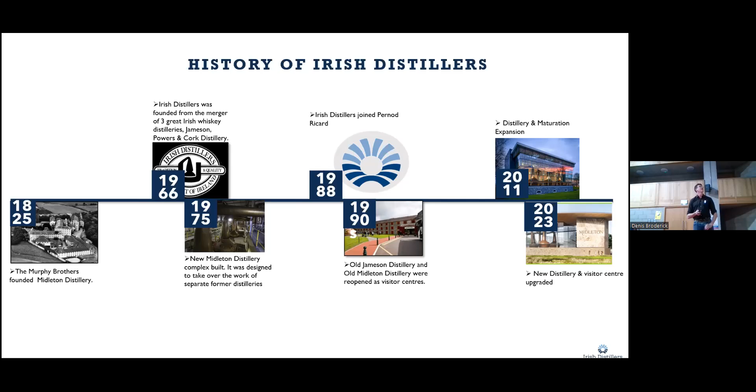A little bit more then—we have 5 locations in Ireland. Our production site is down in Midleton, and our bottling site is up in Dublin in Fox and Geese. Then we have our head offices in Ballsbridge, where all the business goes on within the company.

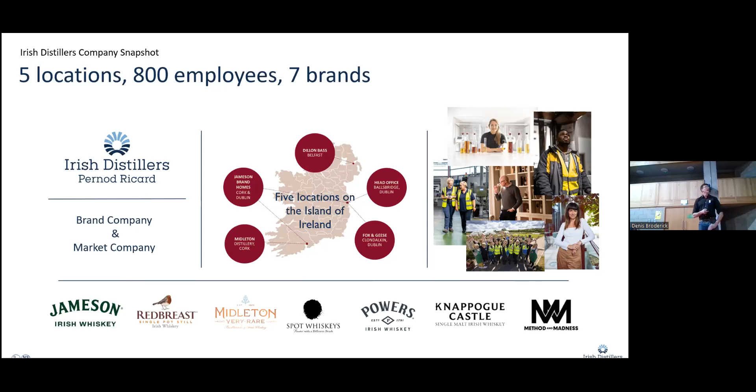Other things to note—when you think of the distillery in Midleton, everyone always thinks Jameson #1, which is fair, but we actually have a broad range of different products as well, including Redbreast, Midleton Rare, the Spot Whiskies range, and Powers, and on and on. So we're not just a one brand company.

So now to get onto the whiskey process—how whiskey is made from step 1. Whiskey takes a lot of energy to produce, which is why we're so keen on reducing the amount of energy we use. So just to take you through each step of how whiskey is made: we have grains that come in on site.

These grains go towards making beer essentially. So we make an intermediate product in our brew house. During the brewing stage, obviously there's a large amount of heat that goes towards brewing. I know for any CIT students here, you would have done the class on brewing.

You have your mashing. After your mashing, you must filter out the grain. And after that, then you must cool down the product before the yeast is added and it goes into fermentation.

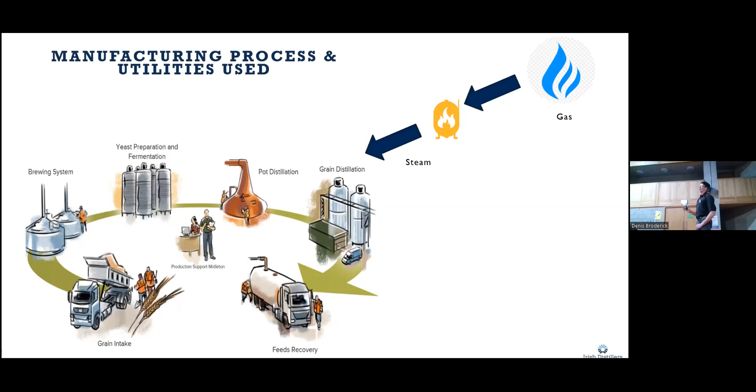The gas that we use on site, it comes in and we put it into our boilers, and our boilers produce steam, and it's the steam that we use for all the heating processes across the site.

We also have electricity, but all the electricity that we use down in Irish Distillers is green electricity. That means it's purchased - we pay a premium cost and get energy sourced from green sources. So there is no carbon footprint from any of the electricity that we use on site.

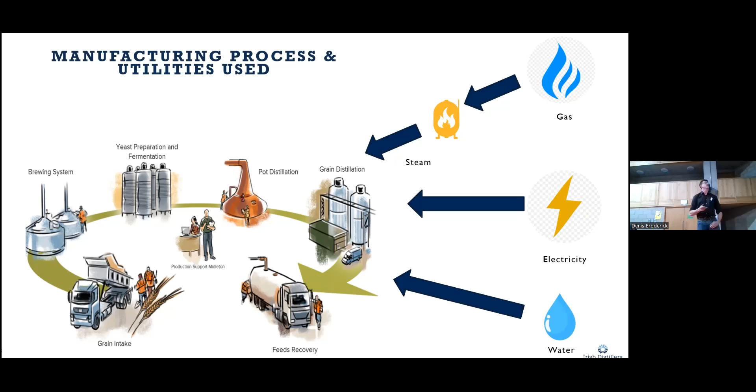And lastly is water. So like I mentioned earlier, we're alongside the Dungourney River and we have borehole water and cavern water as well.

So like I mentioned, sustainability and responsibility is a huge thing that we're taking on board inside Irish Distillers. We have a roadmap that focuses on 4 key areas: nurturing terroir, valuing people, circular making, and responsible hosting.

So these key areas, the one that we're going to be focusing on today is circular making, but it's important to look at the other aspects that we are doing in Irish Distillers.

In regards to nurturing terroir, we have a lot of natural habitats on site that we promote for different animals in our maturation warehouses. So planting wise, we plant specific habitats to encourage the natural habitats to grow. As well as that, we also do beach cleans on site, and we promote responsible drinking and value our people.

So in regards to circular making, this is what we're talking about essentially for the whole presentation here. The energy that we put in, that we're able to recover and reuse it, so that we're minimizing waste at every step by optimizing the production and the distribution of our product to help preserve natural resources.

So the key areas for this in Midleton Distillery is in water, to reduce our water by 20% by 2030, and then in terms of carbon, to remove all scope 1 carbon emissions by 2026. Scope 1 carbon emissions is any carbon emissions that's produced on site from distilling and brewing.

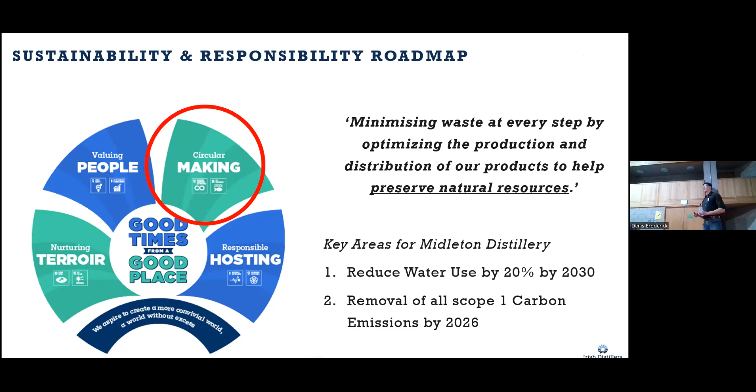So if we look at our carbon roadmap then, in FY22, our carbon emissions was 45,000 tons. The goal is for end of year 2026 to eliminate all these scope 1 carbon emissions.

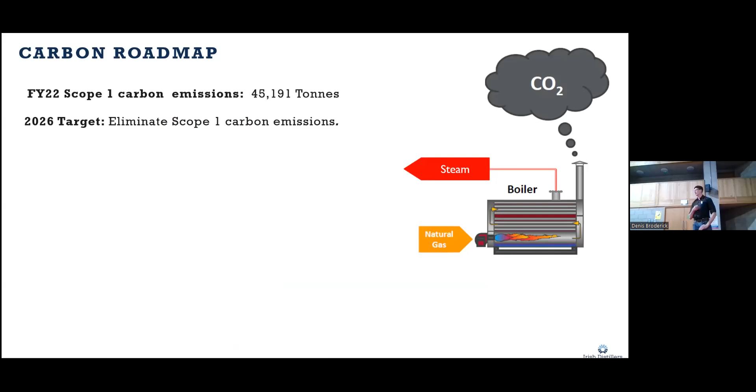So you can see here, just by a small schematic, a basic version of how the CO2 is formed in the process inside. Natural gas into our boilers, we have our steam output, and CO2 is produced.

So the action plan is to phase out the use of fossil fuels to power our distillery by: 1, improving the steam generation efficiency; 2, recovering and reusing any waste heat; and 3, generating energy from a sustainable resource. So we'll go through each of these 3 steps and talk through the different projects and technologies that we're using to achieve each of these.

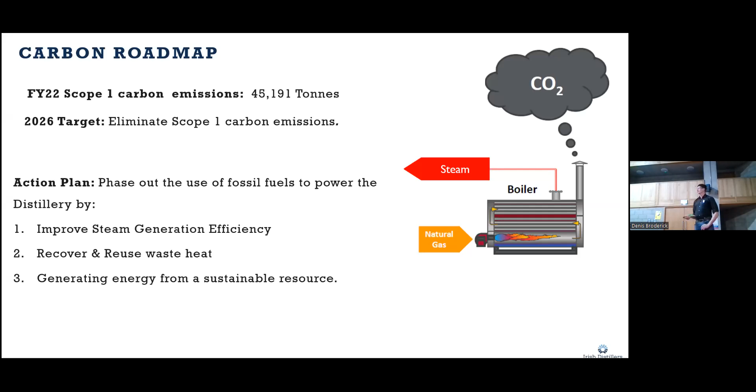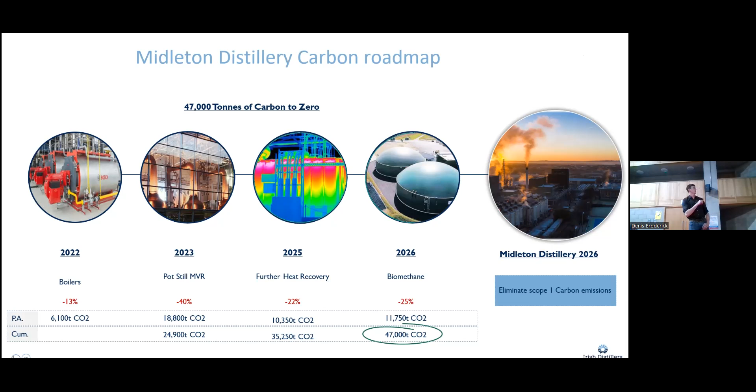In 2022/23, we installed new boilers on site. In 2023, our main project is our pot stills MVRs, which I'll touch on in more detail later. We have further heat recovery in the form of heat pumps and more MVR systems in 2025. To finish it off, in 2026 we plan on producing our own biomethane on site using an anaerobic digester. So that's just a touch on the carbon reduction map as we're approaching it, but we'll go into more detail on each of these.

So the first step is to improve our efficiency via our new boilers. This is quite a basic thing, there's no groundbreaking technology that anyone else is using here. Our old boilers on site were over 40 years old. To use an analogy, it was like an old brush - you can replace the bristles and the handle as much as you want, but at the end of the day you're better off getting a new system. So that's exactly what we did.

The equipment we brought in was dual fuel boilers. When we say dual fuel, they can run off natural gas, which we are currently using, but also off biogas, which we plan on producing in the future. We also have one boiler that can run off fusel oils. Fusel oils are produced in our column distillation - it's a byproduct that we get off, so we're able to reuse that to produce energy, which is great, because otherwise it would essentially just be waste.

As well as that, we have state-of-the-art water treatment now to improve the boiler feed water. Before our water actually enters our boilers, it goes through two reverse osmosis skids. This reduces the conductivity of the water, meaning cleaner water is fed into the boilers. As a result, you get less blowdowns within the boilers. A blowdown is essentially what the boiler has to do to clean itself. If you have high conductivity water going in, you're going to have more blowdowns, and if you're blowing down the contents of your boiler, you're not getting off as much steam and it's not running as efficiently.

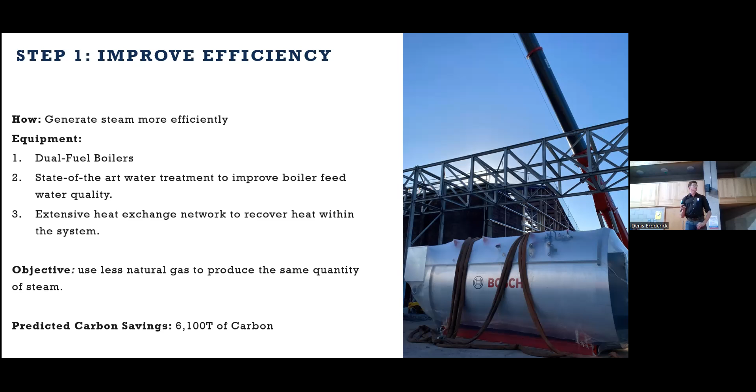So the objective of this project was to use less natural gas and produce the same quantity of steam. The predicted savings in terms of carbon was 6,100 tons. So there's a big green tick alongside that - we actually installed the boilers during the summer, and they're fully commissioned and operational now, so we're already seeing the savings from that at the moment.

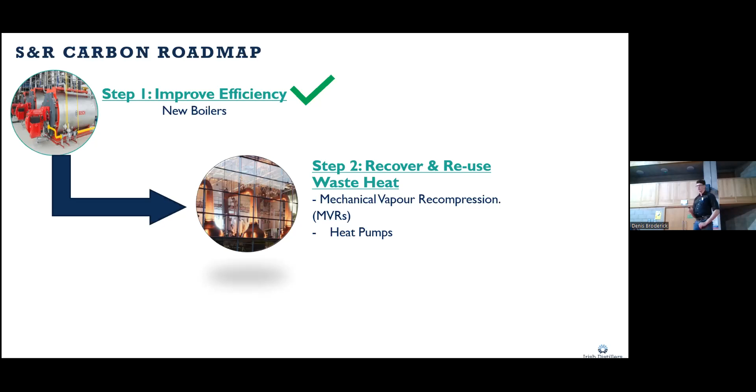So step two can be broken into two different parts: recover and reuse heat. The main project involved is mechanical vapor recompression, or MVRs for short. The second one is heat pumps. So MVR is what we'll talk through first.

The target area to use this MVR technology was inside the pot and column distillation processes. The objective was to recover waste heat from the distillation process and reuse it back into the process, reducing the reliance on boiler steam.

Now you have to stay with me while I explain this one. So MVR is mechanical vapor recompression - what it does is essentially in the name, it compresses vapor down. When you compress vapor down, you increase the pressure in it, and in turn you increase the temperature also. We actually use this technology currently in our column distillation, and we're in the process of installing it in our pot distillation.

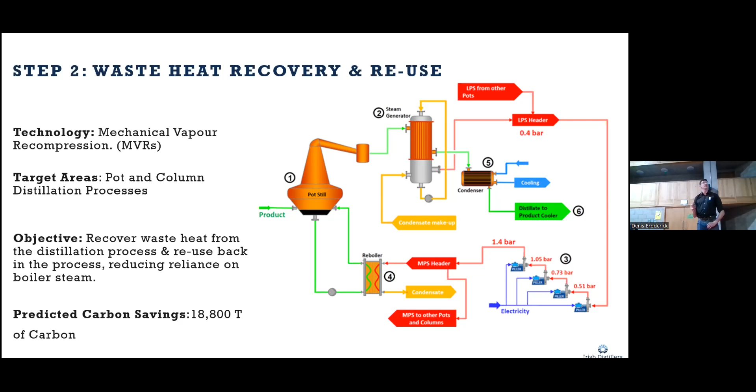And then our product is cooled slightly by going through the steam generator, but then it's strip cooled again in the condenser. So essentially what we have here is a closed kind of energy loop. We have heat coming in initially, and once that heat is there, it's going to be reused. It's continuously circling around the whole system. So once this system is up and going, the idea is that it's self-sufficient, and you're not going to have to top it up with any steam from a boiler.

Oh sorry, and just to go back, the total predicted carbon savings is 18, almost 19,000 tons.

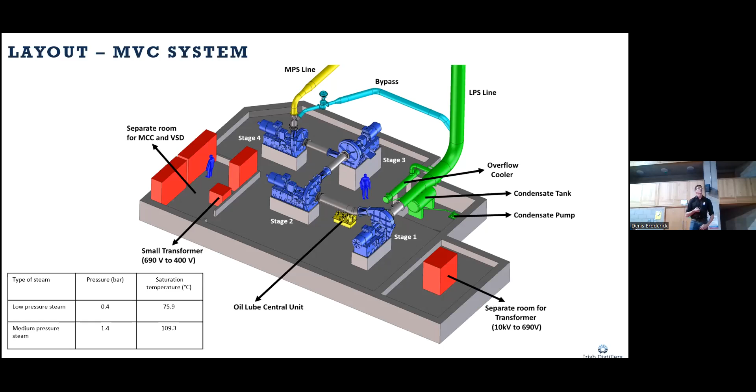Moving on then, another waste heat recovery project that we have is our water-to-water heat pumps. The target here is to generate hot water. We use hot water in several different processes on site for all our CIPs, cleaning places. Any vessels that we're cleaning out, we have to have hot water for them, and we also use it for our distillation process as well.

So the objective of this is that we have at the moment a hot stream in our feeds recovery in the form of hot condensate from our syrup that we produce. At the moment, this hot condensate is just going straight down to our wastewater treatment plant, and it's treated down there, and the heat is just lost.

We plan on using this heat to feed into our heat pump and produce hot water from it. Predicted savings from this is 10,350 tons of carbon.

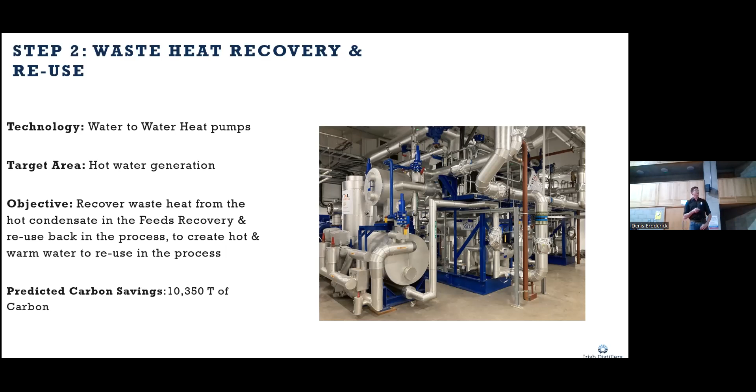So our electricity usage will obviously increase from projects like our MVR projects and our heat pump projects, but more importantly, our gas usage will drop.

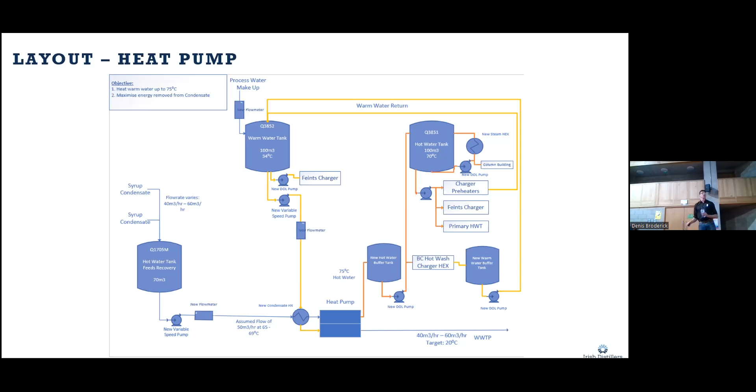So the next step is to generate renewable gas via anaerobic digestion from our distillery byproducts. This is essentially the final step of our carbon reduction plan. The technology we're going to use is an anaerobic digester, and obviously we're going to generate steam from these. The end target is to generate steam, and the objective is to generate renewable gas from a sustainable resource, which is byproducts within the distillery, replacing the natural gas we use to feed into the boilers.

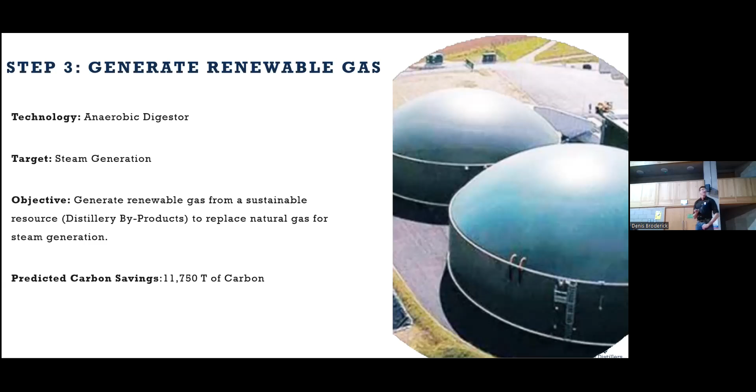Predicted savings from this is 11,750 tons of carbon. Let me skip one.

When we were planning this out, the options considered were woodchip biomass, on-site biogas, biomethane, electric boilers, and green hydrogen, but on-site biogas was selected as the lowest levelized cost of energy.

Studies confirm that IDL have sufficient AD feedstock from the distillery byproducts to produce enough biogas for the remaining future of natural gas. This refers to the byproducts we produce in our feed recovery, which we mentioned earlier. We have thin stillage and centrifuge liquor, which would be the main feeds going into this anaerobic digester.

Our thin stillage is essentially the components left in our wash columns after distillation. In our continuous side of distillation, we have wash that feeds in, and the very first distillation column is our wash column, and the product left behind is thin stillage that goes towards this. Our centrifuge liquor is our product after that.